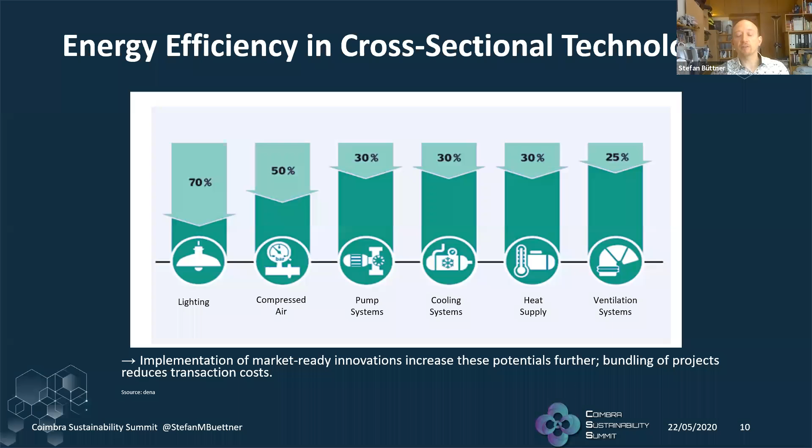So there have been multiple studies on what could be done, what would have big impact. There are studies in Britain, studies in Germany on how market-ready innovations that are already out there can increase potentials and allow us to reduce costs and make better use of the resources we have. These innovations differ quite drastically by the return on investment, by the cost of getting to know how to implement them. So I'm not focusing on the heavy lift, which would be the high temperature heat pump with the largest single savings potential. I'm focusing more on what can be done by just being smart about it.

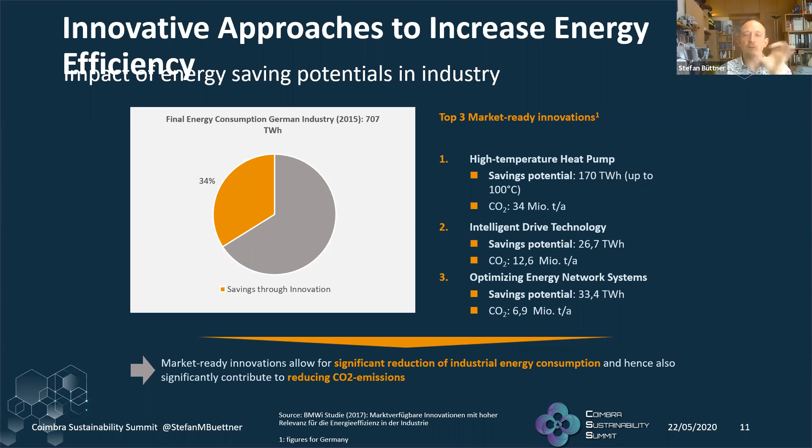That is optimization of network systems, energy systems, local energy systems - finding out what you consume, finding out where you consume it, whether you actually need to consume it at that point, and also how you can make it happen not to consume anymore. Once you have understood as a user the principles, you then can enter the second phase, which is trying to automate that, trying to get digital assistants and machine learning, AIs, etc. that help you to do that. But first of all, it's the human being that needs to understand the principles where you actually need to touch base first. And how you do that in principle in plants is 4 basic intervention points.

The first one is adjustment of installed power. The second one, control technologies - there, for example, if you look at buildings, at your own homes where you have potentially heating systems, you get them installed, you get them set at the first instance, but do you ever change the settings to the use? That hardly happens. And that's the point where you can actually make the big savings, which is also leading to the optimization of process parameters and making use of further energy losses or unnecessary resource losses.

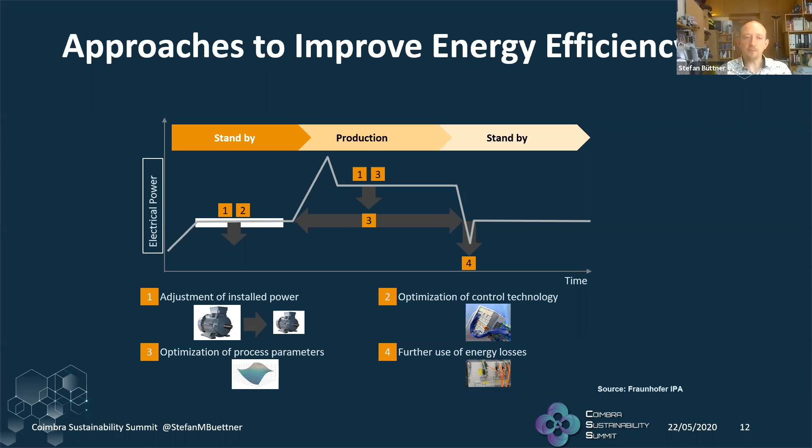That can be done to optimize standby consumption, production consumption, and output. Now, some quick examples. You will have access to the slides afterwards, so I'm going to be quick about them, just showing you the principles. So how do you adjust installed power?

You need to understand what the consumption is at the moment, and here we did that with a 48 channel long time measurement of power consumption in the plant. Essentially, the findings were it is more efficient to have two 100 kilowatt AC torque engines rather than one 260 kilowatt DC engine, allowing us to reduce not only energy costs, but also acquisition costs. It's like having a car with a big engine versus an electric motor at each of the wheels.

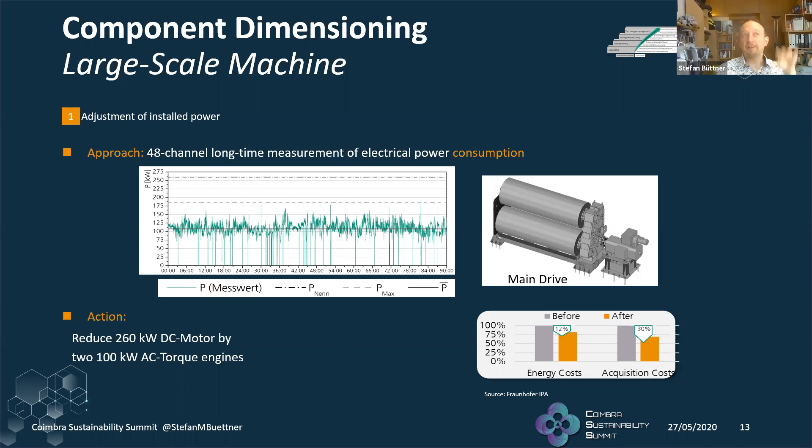The second one is optimization of the control technology. Imagine how we have the power peaks in households in Europe, in principle, in factories everywhere. When you switch everything on at once, you have a huge power peak, and your grid connection or your installed load is optimized for that interval. However, it's not necessary to switch on everything at once in most cases. In this instance, cascading the starting time of the different engines and then switching them off during setup and standby allowed us to not only reduce the load peaks, but also the standby consumption dramatically.

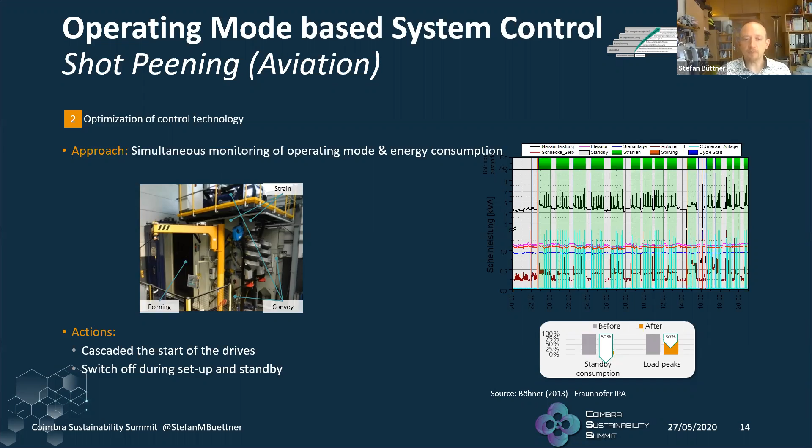In the efficiency barometer, we also found that three quarters of companies have no idea about their standby consumption, and there are still many engines that are either fully on or off. They don't have an energy savings mode because of the greasing cycle that is necessary.

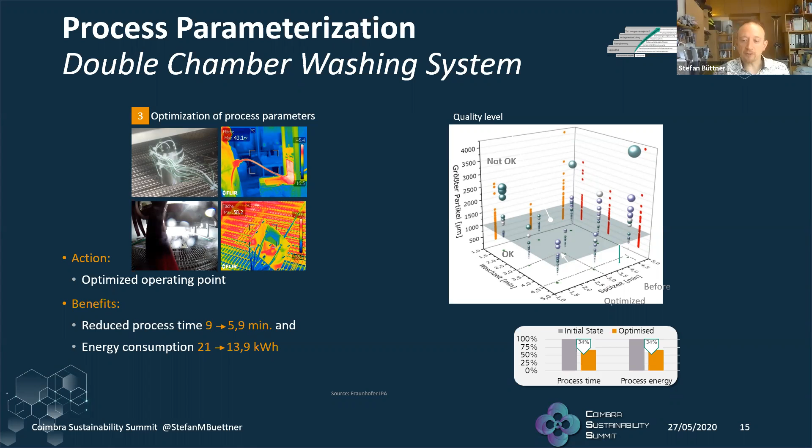Another means is the optimization of process parameters. For example, it's a means of finding out how you get the same result with perhaps a shorter process time or a different temperature. Here you can use the example of baking bread, where you may be used to a certain duration and temperature, but maybe you can get a higher output or save energy with a shorter period at a higher temperature, or the other way around. In this example, we were also able to save a third.

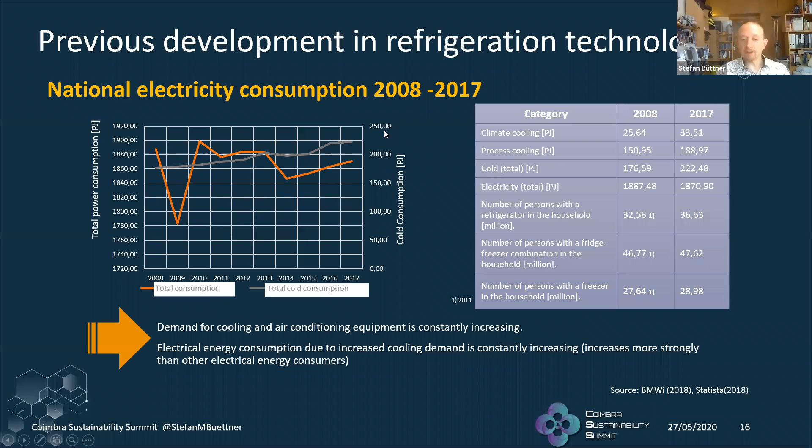What can you do as well? We also have the situation of increasing temperature and increasing needs to cool equipment, not only IT equipment. In contrast to the development of overall electricity consumption, we see these peaks. The one of cold consumption is gradually increasing for different applications, cooling, air conditioning, etc.

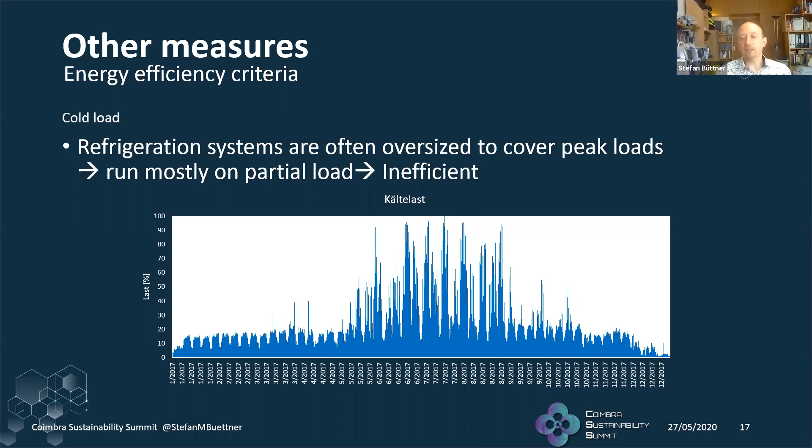So what can be done there is understanding that refrigeration systems are often oversized to cover peak loads, and mostly they run in partial load. So the machines have a certain base load that is catered for. It's often catering for personnel and the need for personnel that cause these additional cooling needs. So there, if one has the data, there are means to find another approach that is more efficient in finding the solution for the issue.

But what are the future concepts for industry that we have started using now? They start with some questions. How far do you want to go? What is the ideal mix based on your circumstances, your sector, your technology? What are the key factors that you want to optimize for in terms of environment? That's not only the natural environment, but also your company's environment, the expertise to hand, the investment cost or the cost ratio, the priorities in management, as well as the individual needs. There we have renewables, efficiency, flexibility, storage systems, and smart grid solutions. I'm going to give you a quick dive into each of those fields, indicating where it could go.

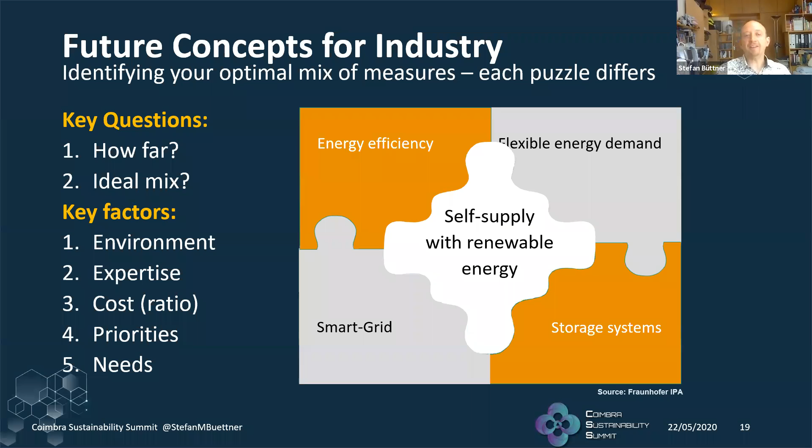Where it could go when? Right now, when we have COVID-19, or afterwards or before, the system is changing quite a bit. This sad development of the pandemic is really causing lots of harm to many people across this world, but there are also a few positive aspects, and that is that the workforce and individuals are in many cases confronted with digital needs from their employers, at school, everywhere. This ad hoc confrontation pulls down barriers and uncovers shortcomings in the systems, in the preparedness. So people are forced to get used to it.

This is a big opportunity, because also when we touch first base with Facebook and the like, it took a critical mass for it to succeed. Having now the situation, going to work in a virtual office or having virtual meetings is becoming more and more common. The resilience and flexibility of business models and supply chains are now more in the center, or should be, because one can either be prepared and utilize the time to think how one can innovate, improve the business model, or just hope for it to be over and survive as a business.

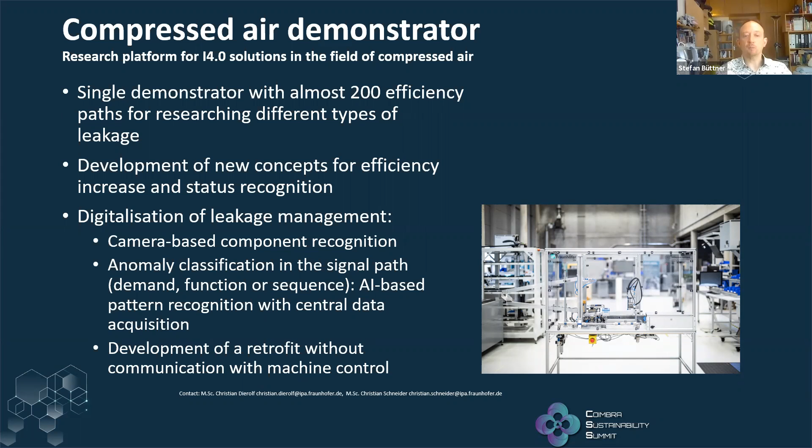One of the projects is to identify different means - in this case, 200 different means - to automatically identify leakage reasons, and to identify status recognition with cameras and AI-based pattern recognition.

Now, if you scale up a bit from the individual application to the bigger picture, we're looking at a future concept where we have efficiency on one side, effectiveness on the other, marrying the two seemingly impossible elements, but also adding flexibility to that. The more flexible, the better.

Why is that important? When we have to integrate fluctuating generation from an increasing amount of renewables, when big energy users such as steel companies or aluminium manufacturers weigh about 2% of the nation's electricity consumption, they are a big burden to the grid. However, they can also be a big opportunity, which we'll learn later.

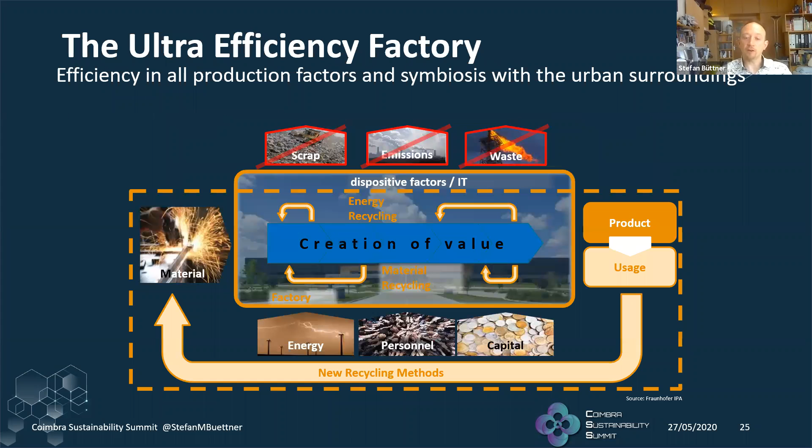So the long-term aim is to transition towards something we call the ultra efficiency factory, where all input factors are used in the product, where there's no scrap, no emissions, and no waste.

Even with a lot size of one, there are applications from big companies that used to take weeks to tailor solutions for their clients. However, these days, they just go there with their smartphones, take a round view, and then their system allows them to precisely simulate and plan out the solution for the client.

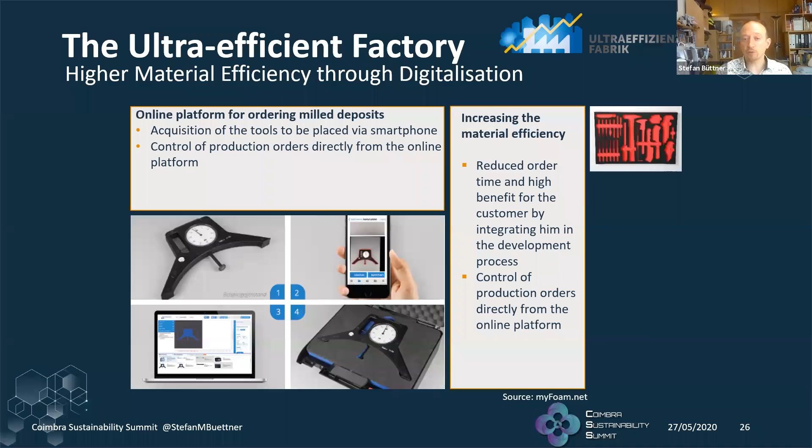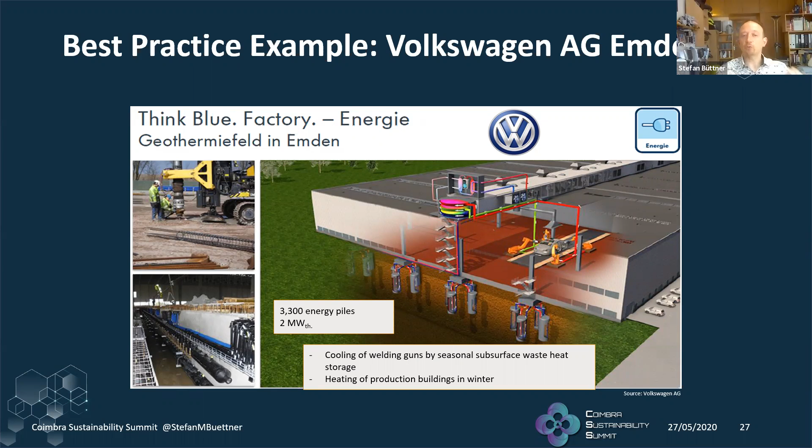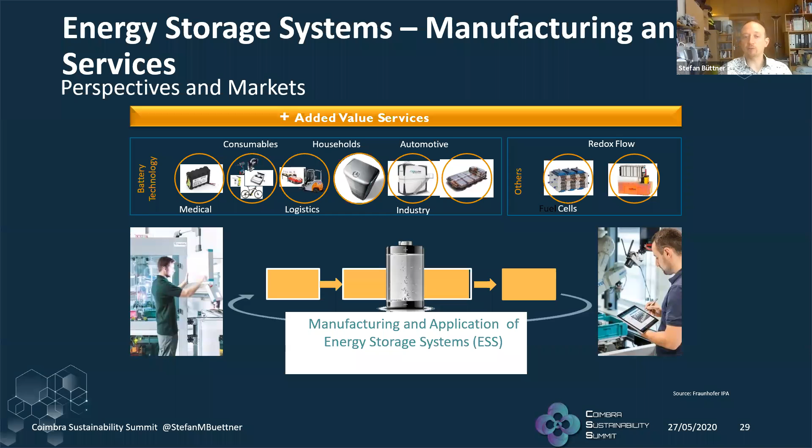Talking about storage - storage systems, batteries are a big opportunity, but also a challenge. There are so many different types of batteries: short-term batteries that have lots of capacity but not so much load, and the exact opposite for different means.

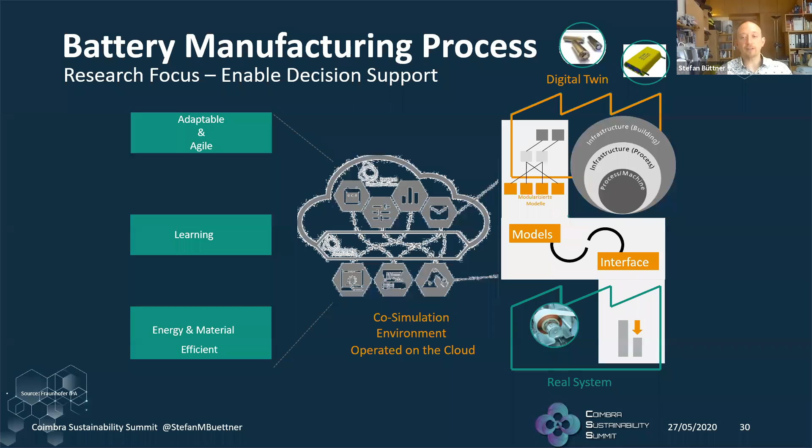So with batteries, we also have the challenge of what we need them for and how we manufacture them. Before actually applying or manufacturing it, it's a matter of finding out what to use it for, and therefore simulating the demand and utilization. That's what we call a virtual twin, a digital twin.

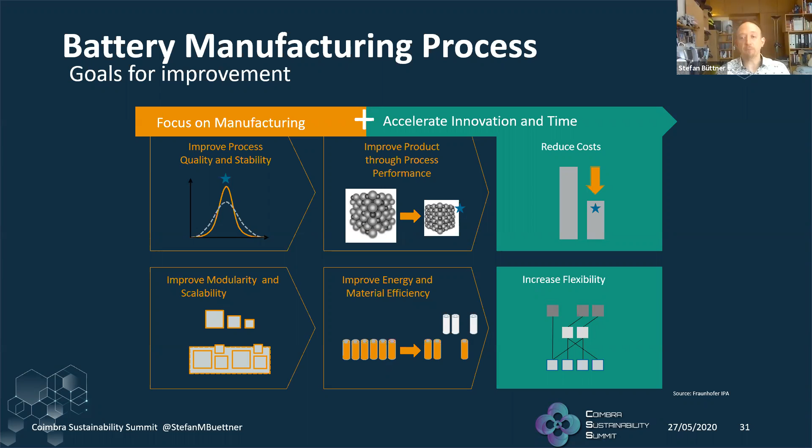But rather than, in the past, just focusing on manufacturing, now we also focus on acceleration of innovation and time, which reduces cost and increases flexibility of the system, allowing us a closed loop where the factory also considers disassembly of the product in the end.

When we talk about storage, we also need to talk about DC, direct current rather than alternating current. With DC, it's possible to smarten up the local grid, the industrial smart grid, because it allows you, without additional input, to feed in renewables.

Without converters, you can feed in storage and connect things up with each other, and also share and transport data without the need for additional infrastructure, which leads to higher reliability, expandability, and integration of flexible loads.

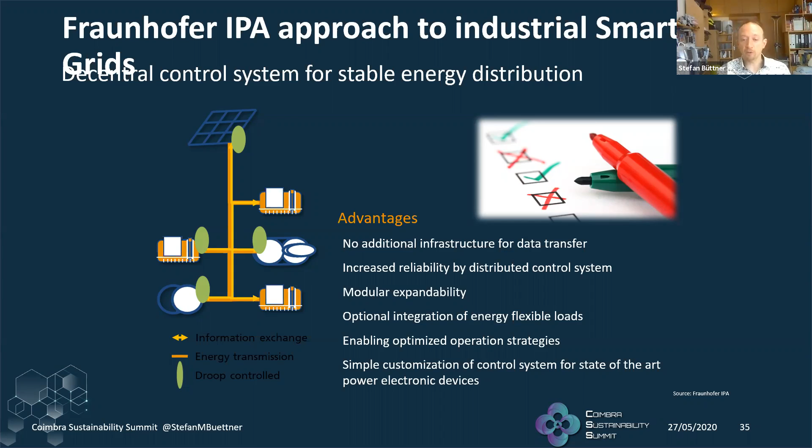On this slide, you could see a video demonstration when you go back to it. But in principle, what can be done? You get higher robustness against outages if you use it, for example, in such an assembly line.

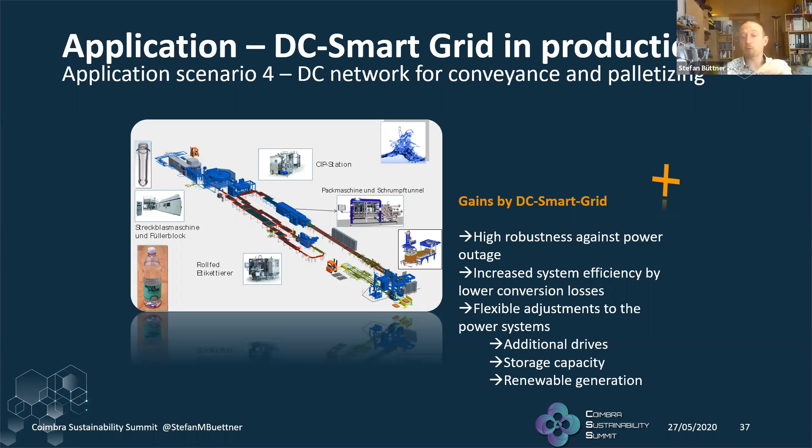There's also another example with a car manufacturer that combined three robots with each other that lift and put things down. Just by connecting three robots with each other, they save a third of the energy.

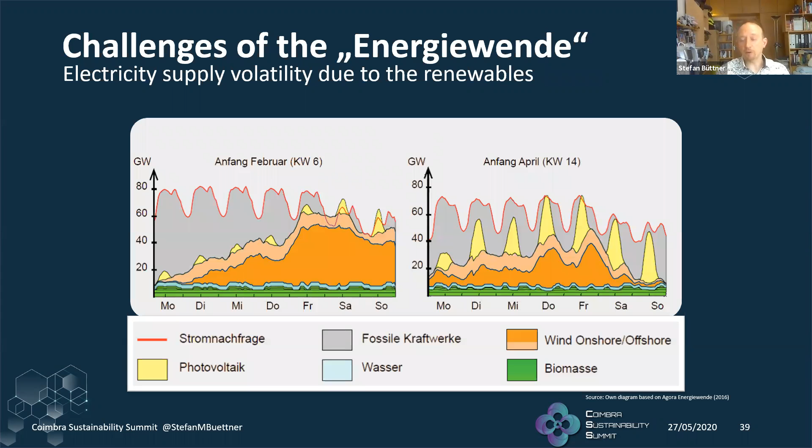Talking about storage and flexibility, there's also something called virtual storage. As said, we do have fluctuating energy supply due to renewables. How do we make the system ready for such renewables?

Germany has come up with so-called Copernicus projects to accompany the energy transition. One of them is about the industrial sector. Why is that? Because the industrial sector makes up 45% of Germany's electricity consumption, before any decarbonization efforts. So how can we utilize the heavyweight of industry to serve as a compensator rather than being forced to spend 1.5 billion euros a year to compensate those that can't feed in their electricity?

So what are the synchronized and energy adaptive production technologies, where the processes and algorithms identify the ideal point of intervention and then apply one of those flexibility measures, such as change of source of energy, pausing a process, shifting idle times, or storage of energy.

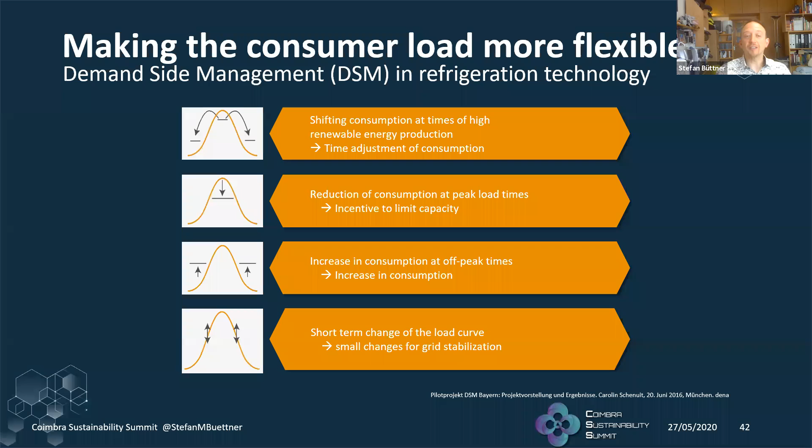Applied to the refrigeration example earlier, that could mean shifting consumption to times of high renewable energy production, reducing at peak load times by cooling it down more whenever there's surplus so it lasts longer, increasing consumption when there's a surplus, and also changing the load curve spontaneously. Why is that a good thing?

Because it allows us to reduce the need for single-purpose battery storage and compensates fluctuation in the grid. Also, it provides energy security.

This is relevant because, for example, there's one aluminium company responsible for 2% of Germany's electricity consumption. If they flexibilize just one of their aluminium smelts, they can virtually store 1 gigawatt hour over 48 hours. If that was applied across the board in all aluminium smelts in Germany, that would save as much as a third of the overall pump storage capacity of the country.

And that's just the electrolysis process in this one industry. Imagine if that was scaled up.

But there's more, and that is best described with this statement: the biggest innovation of the 21st century will be the intersection between biology and technology. What does this mean? It means designing biointelligent products that take in information during the use phase and are able to be ecologically sound in their disposal and refabricated.

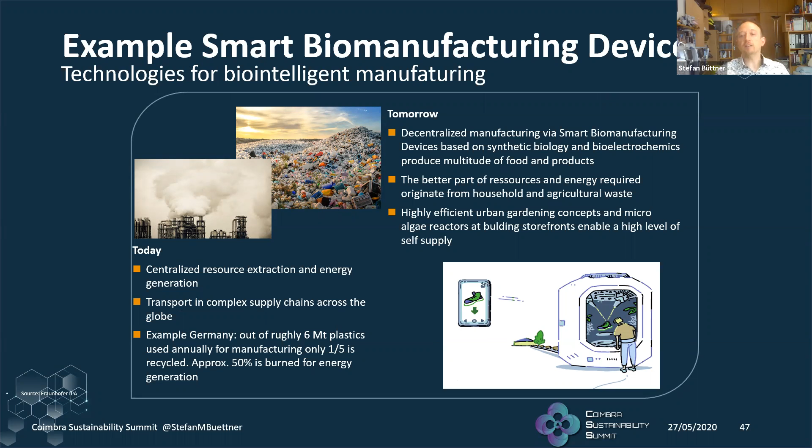With a feedback system. So what could this mean? Decentralized manufacturing via smart biomanufacturing, better resource and energy utilization, and highly efficient concepts. These can be applied to new materials, biotech interfaces, manufacturing technologies, data processing, many different fields, also medicine.

And that brings us to the next topic. Imagine the fact that in many instances there's data gathered for specific use cases that depend on the mixture of machinery you have right now. But what happens if you change machinery? What happens if you lose that person who is able to read that data?

What would be, if it was possible, much easier is something like in home automation today or with smartphones, where you have one operating system that works as a base and the skills of the hardware are integrated. Imagine we had something like this for manufacturing, where skills of the machines, such as sniffing sensors for quality or energy sensors for consumption and resource utilization, would automatically feed back to a central system that would allow you simply to utilize a dashboard.

And the same thing with cybersecurity, tightening the processes up so that they're hack-safe, because that's the downside. There's far too much innovation not thinking of the evil trying to find loopholes and sabotage things. I'm glad we'll hear a bit more about something that could promise a way out of this conundrum, and that is FabOS, which I believe Daniel will tell you more about later.

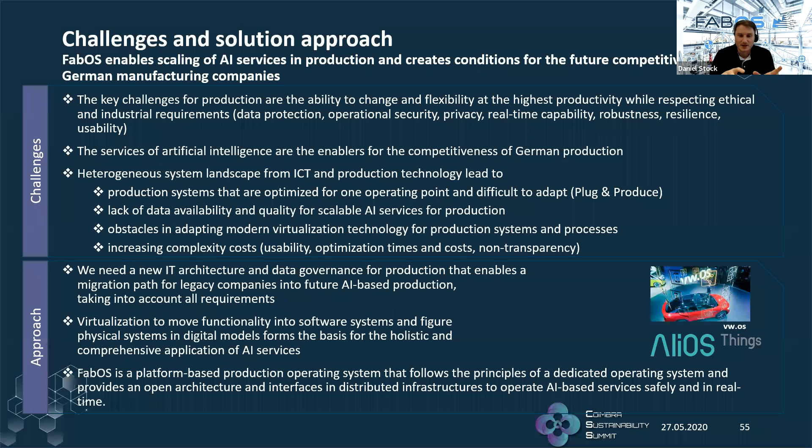Similar concepts should be applied to operational technology, which is already being done in small spaces, and we want to bring it together on this FabOS platform, which follows principles of an operating system - so we call it the FabOS operating system. But you shouldn't expect it to be like Windows XP for your factory, where someone brings a DVD with FabOS and installs it. It's basically tying together all the components we've been developing over the years - platforms, applications, and various virtualization technologies - and we want to tie them together.

As I mentioned, we want to bring together OT and IT, which is converging more and more in other areas. We want to show which applications we know from other areas, especially cloud technology and communication technology, can be applied in OT. There we see new possibilities but also new challenges, especially how to apply this so that companies can use it. We have to think about SMEs and users in the factory - an important topic in our research project is how to enable smaller companies to adopt this technology, not only larger companies who can do it by themselves.

As I said, FabOS is basically a platform operating system. If you look at how ecosystem and platform structures developed, we have various platform technologies that bring people together - something like the Apple iOS platform with its app store - and then we have production technology platforms, something like Adamos IIoT, or Axoom, or other platforms.

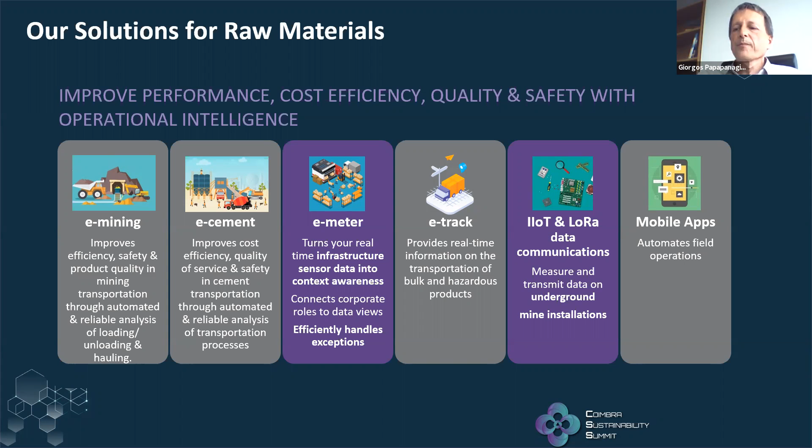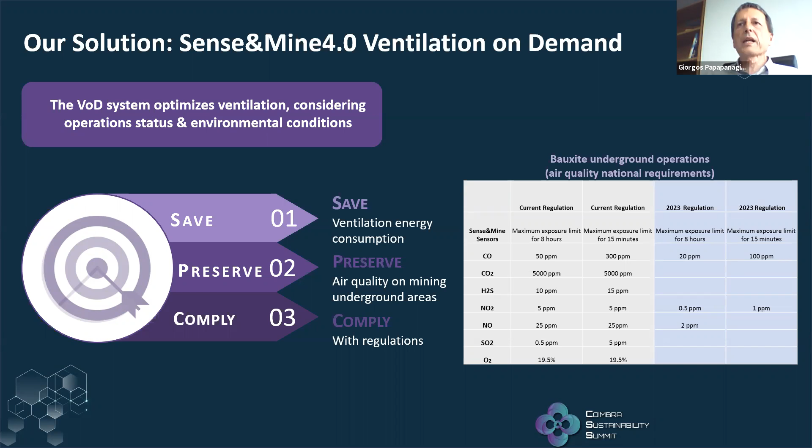Also, we keep data from the underground mining assets, operations, and engine running, and also control the ventilator operations.

All the data are getting out of the underground area by a network of LoRa cells that broadcast the data inside the underground areas and goes to a gateway and then to the cloud, to a cloud platform where is the ventilation on demand server.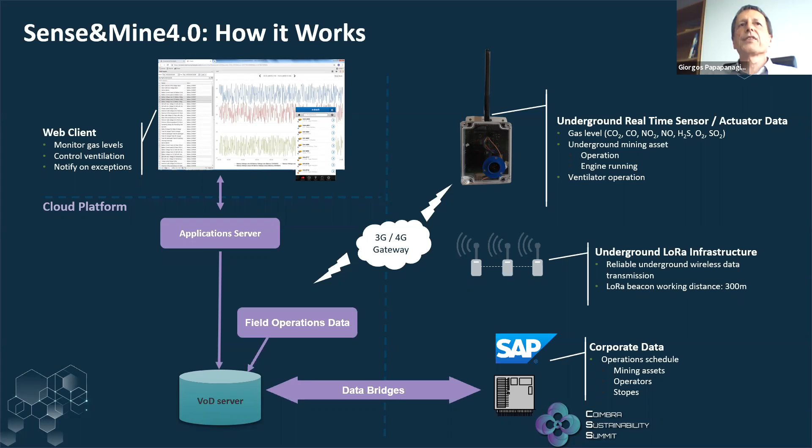So currently we are working in order to expand these solutions and include other operation technology, OT equipment of the underground operations, like infrastructure monitoring, lighting, pumps, elevators, doors, and other kind of underground equipment, alert on fluid, fire and smoke, and also asset location and asset working cycle monitoring, operator location for safety, power management and metering, and airflow measurement.

So the baseline is to provide an easy to deploy solution for underground operations. And currently also we are working to extend our air quality management platform to other customers, and we are looking for partners in order to extend the solution into manufacturing installations.

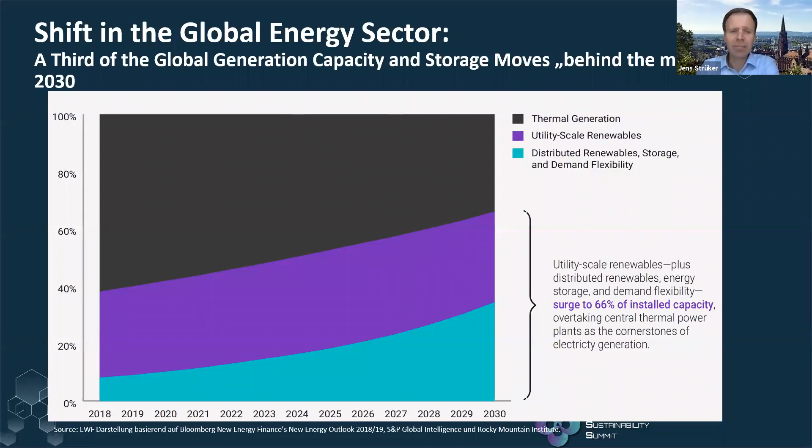We will see rising costs. The regulated part of the energy system, at least in Europe, means we have to install a lot of backups. Stefan already talked about that, sorry. Can we go to the next slide?